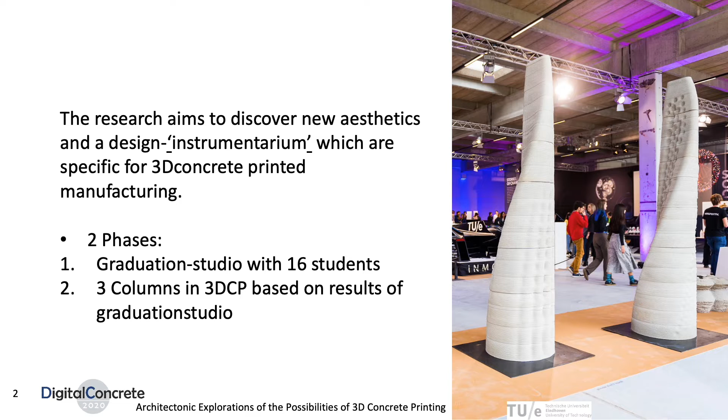The second phase consisted of printing prototypes. A selection of results and findings of the 1-year research in the graduation studio have been elaborated and collated into a new final product and summary design for 3 3-meter high columns featuring new aesthetic possibilities in 3D concrete printing.

The graduation studio was led by 4 tutors: Kuit, Sjef van Hoof, Zeeshan, Ahmed and myself, Juliette Bekkering. The research was done by many people. 16 students contributed actively to the results.

As a test case, we took the city of Ghent as location. The city has many buildings that represent a time when craftsmanship reigned supreme, and facades were ornamented with sculptures and carvings. Today's high labor costs mean that this ornamentation and complex formal language can only be realized in very exceptional cases. However, 3D concrete printing makes it possible to realize complex shapes and ornamentation, as the printing process makes complicated formworks and labor-intensive machining processes superfluous.

The question we asked ourselves is how can the richly decorated historical facades of the city become an inspiration for the development of new designs that can be realized with 3D concrete printing? A meticulous analysis of the historical facade fragments was done. Students reinterpreted the fragments using the technique of 3D concrete printing and translated that into new architectural designs that were printed in a laboratory.

The goal of the design studio was to allow design and experimentation with the 3D concrete printer to go hand in hand. Prototypes were printed and experiments done. Design by doing. The first starting point was to fathom the possibilities and constraints of the printer and the material: angles of inclination that could be printed, the straitjacket of the continuous printed line, limitations due to gravity, and the curing process of the material.

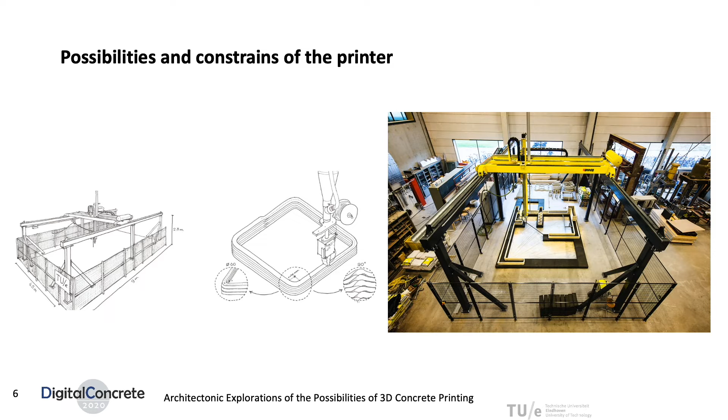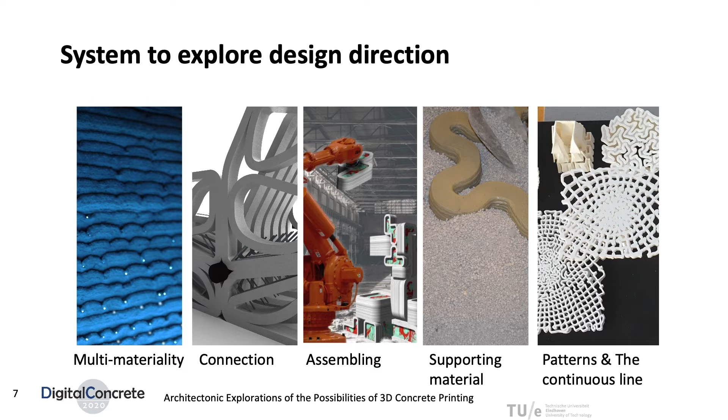The second starting point was that the students had to learn to work with a printer, from cleaning the printer to mastering programs that allow parametric modeling such as Grasshopper and Rhino in order to draw 3D models. In order to research the meaning of 3D concrete printing for architecture, the technique itself was researched along 5 parallel individual themes: multimateriality, connections, assembling, supporting material, and patterns.

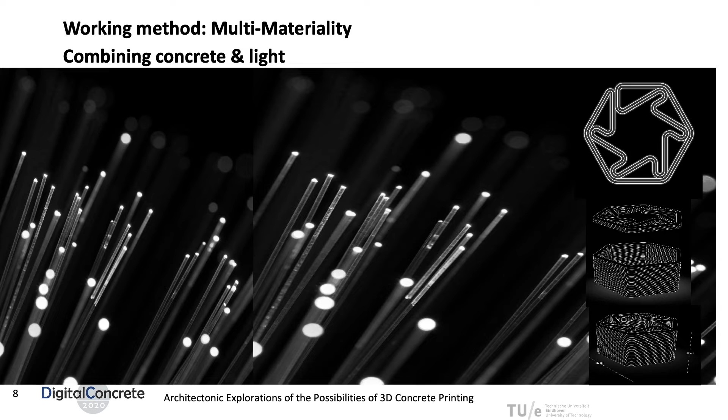Multimateriality, combining materials, concrete and light. Multimateriality and the potential of working with different materials was studied. In this case, the possibilities of creating a translucent concrete were tested. Glass fibers were introduced in the concrete, thus creating a translucent effect when lights were set on the surface. Glass fibers were in first instance put manually in the concrete. In a later stage, a device could be developed that inserts the fibers in the concrete during the printing process.

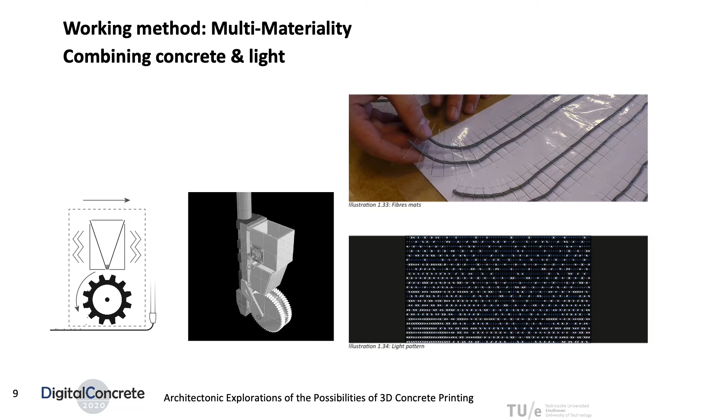The result was a concrete artifact that lights up when lights are placed on the inside. The glass fibers guide the light through the concrete and give the concrete a translucent effect, glowing like a lantern.

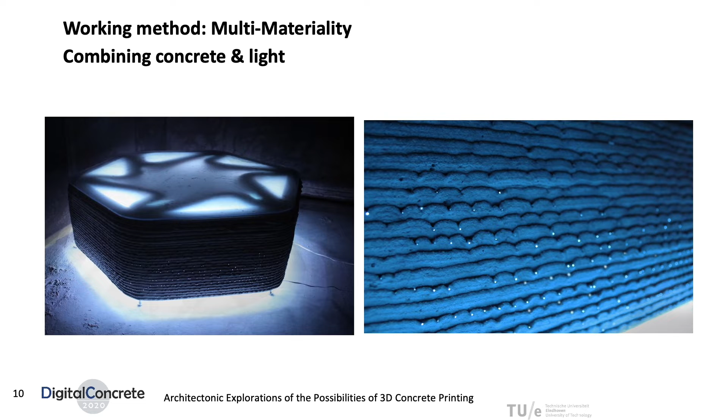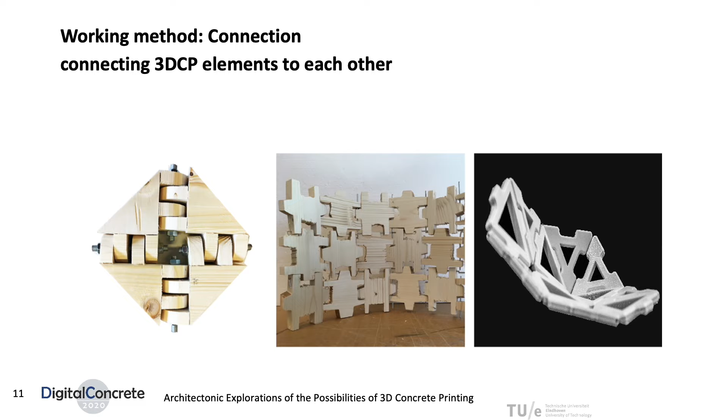Connection, optimization, 3D concrete printing and flexibility. The subject of the research was connection and how printed concrete objects can be connected to each other. Elements could form huge flexible walls, bending and bowing walls. In addition, the question was how 3D concrete printing elements can be attached to adjacent elements of different materials, such as window frames, doors, floors, and walls. Different kinds of joints were examined, exploring fixed and flexible joints. A prototype was made with flexible rubber joints.

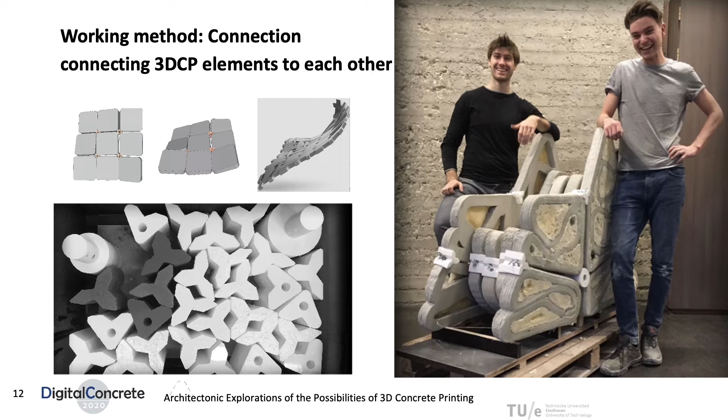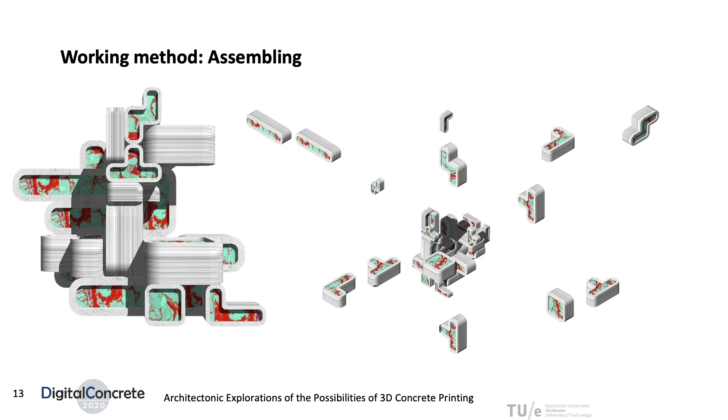Assembly. The group's research focused on how different fragments can be printed and assembled. Research was twofold. On the one hand, it focused on the development of complex geometries that could be printed. On the other hand, it focused on the way in which the individual elements could be assembled and interlocked to form a larger whole.

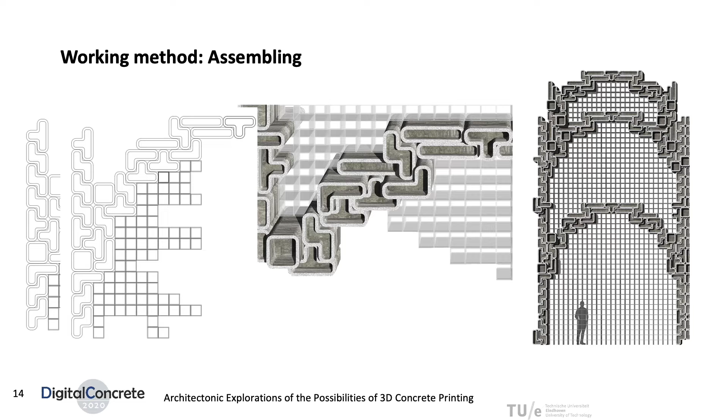Support. An important aspect in the use of concrete is the formwork and the way the liquid material is poured into a mold. A range of formwork materials has been tested, ranging from more traditional materials, such as sand and gravel, to more experimental materials, such as printing in glass beads, gel, liquid clay, and even in yogurt. The results were promising, as double curved surfaces, overhangs, and flowing round shapes became possible.

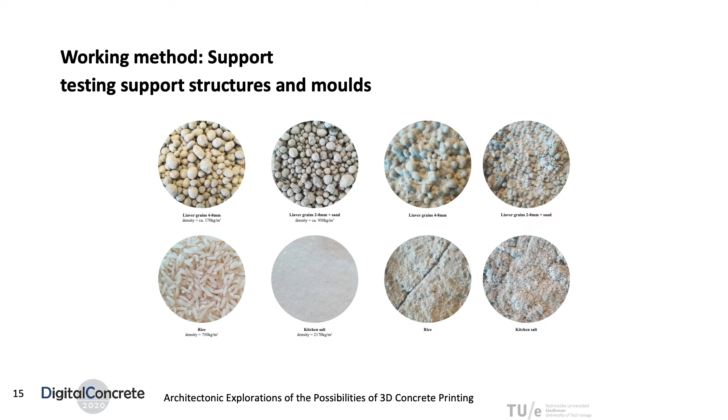For the artifact, the technique with glass beads was taken as casting material. Because the material tended to collapse after a number of printing layers, a system was devised to print the concrete in a crate, whereby the crate is raised during printing. The crate is continuously filled with glass beads during the printing.

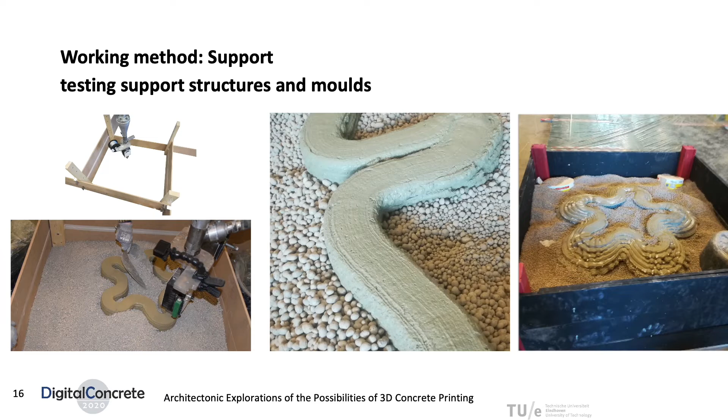The results of the research was a free-form vase in which the limits of manufacturability were explored. In the future, we expect a lot from this process of printing in liquid materials, where strictly speaking full 3D printing becomes possible and the limitations of gravity can be tackled.

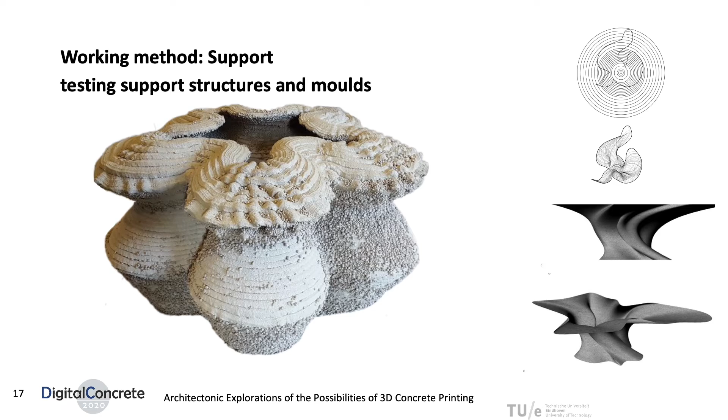Patterns and the continuous line. Finding textures and study structural properties. The technique of 3D printing lends itself perfectly to printing different patterns, the principle of the continuous line.

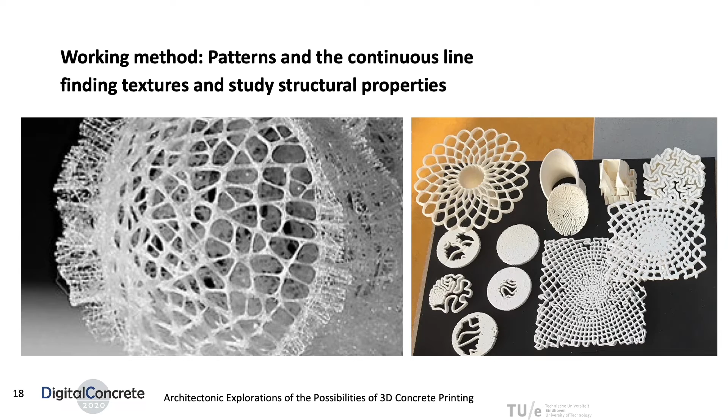By studying different mathematical models, we found that a lot of algorithms already studied could help us to fill a region with one continuous line that folds on itself. This was possible by combining two studies, the traveling salesman problem and the circle relaxation. The first one helped us to connect with one single line a certain number of points in a region, according to the shortest path. The second one ensures that between each point there is a fixed distance.

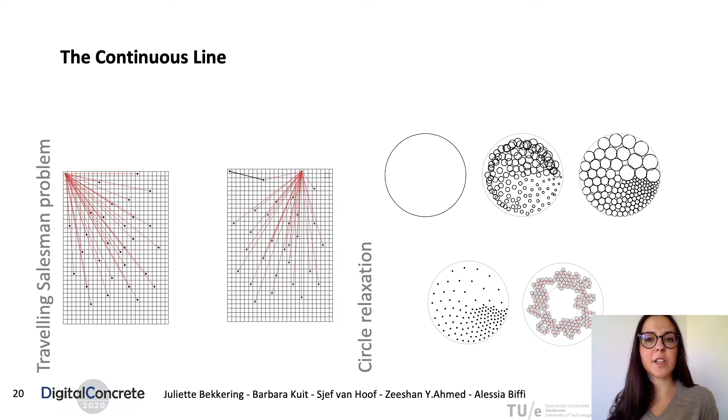This is fundamental in order to ensure that there is a fixed distance between the folding line of the printing path. This is done by making each point the center of a circle with a fixed radius. Through a system of vectors, the circles are moving in order to reach a status of equilibrium, where all the circles are tangent to each other. The radius of the circle, so the distance between each point, can vary by using a color code. In this way, we can fill a region with different sizes of openings.

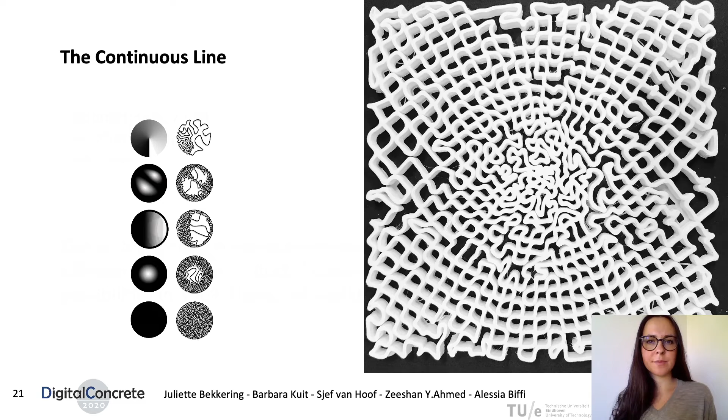Through these researches, we learned that using supporting material, we can print high elements with large cantilever, and that there is still a large field to discover on how we can improve the aesthetic qualities of 3D concrete printing. In addition, we understood that it's fundamental working with parametric model.

After this year of researching into 3D concrete printing, we combined the findings into 3 3D printed columns, which were presented last year at the Dutch Design Week in Eindhoven. This was possible thanks to collaboration between the TU Eindhoven University, and more specifically with Juliette, Bekkering, Sjef and myself, and together with a 3D printing specialist Vertico, guided by Volker Ruitinger.

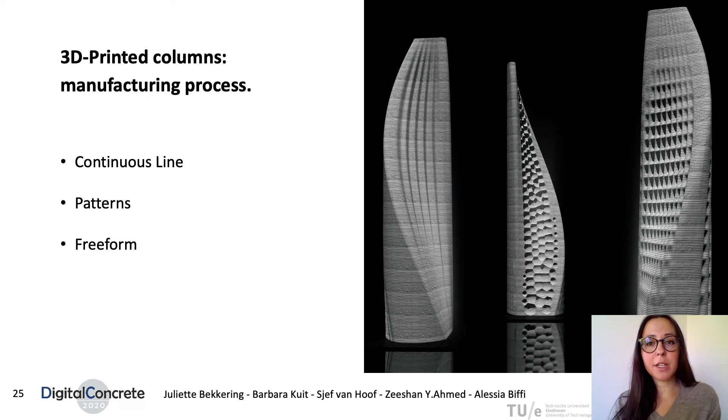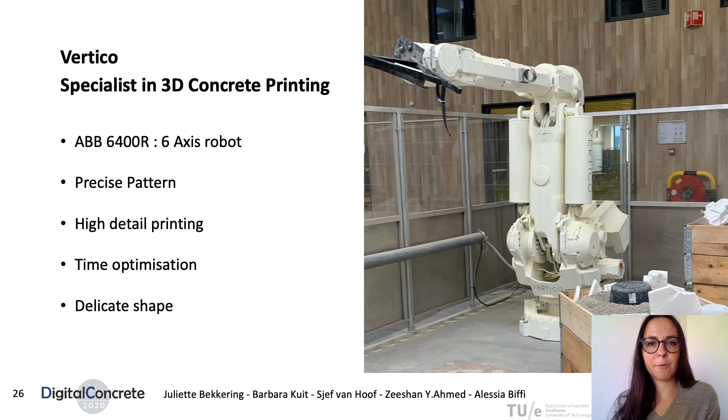We started to investigate how to design and manufacture 3 columns 3 meters high. The columns are characterized by free-form shapes and different patterns on their surface. The choice of collaborating with Vertico was fundamental in this aspect. Thanks to their experience and their 6-axis robot, we could reach highly detailed printings, thanks to the possibility to print a very thin print path. The 3 columns were designed by using the same script and by varying its parameters as height, rotation, and diameters.

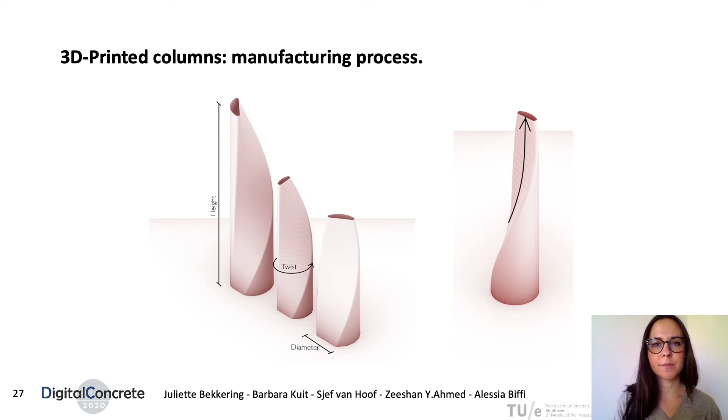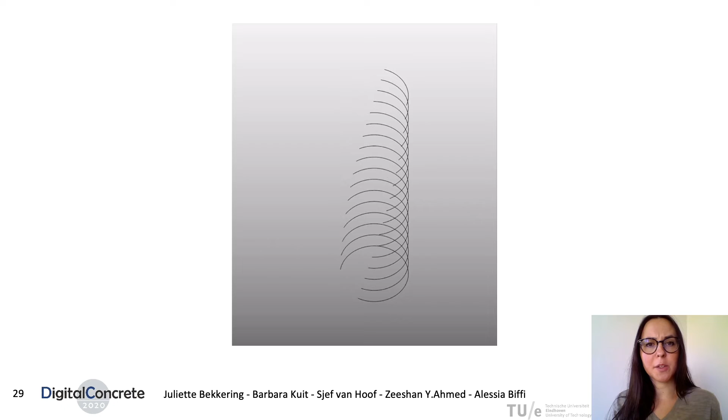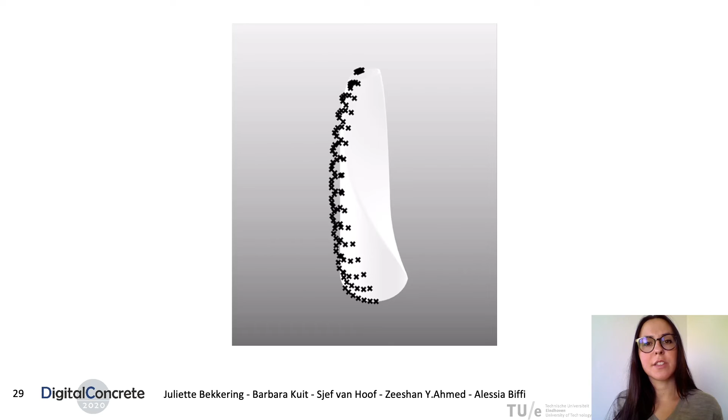On the twisted side, a particular pattern was investigated by tweaking the printing path. The starting point was a basic column. By varying its bottom and top and by rotating it, we obtained a twisted column. The column after is sliced in different pieces along the z-axis. Each curve is divided in points. These last ones are moved along a certain direction. By lofting all the curves, we obtain our 3 different columns.

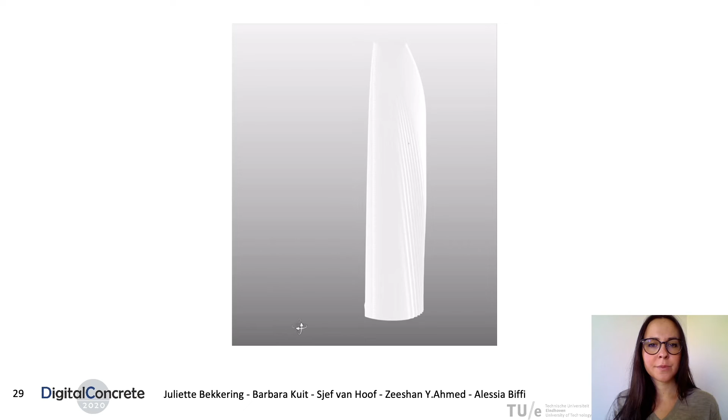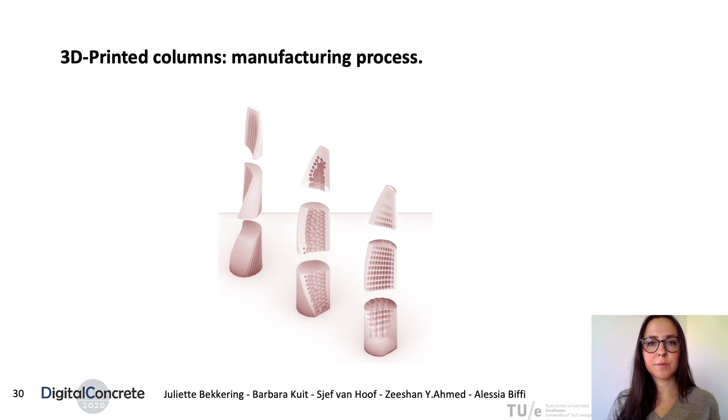Due to the dimension of the robot and our equipment to contain the supporting material, we had to split the columns in 3 parts, 1 meter each. This was also important to ensure the transportation to the exposition location. During the printing process, the use of glass balls as supporting material was fundamental. This was made to ensure that the cantilever sides were not collapsing. We printed inside of a wooden box that was filled with supporting material during the printing process. Once the print was done, we waited 24 hours for the concrete to dry to remove the balls.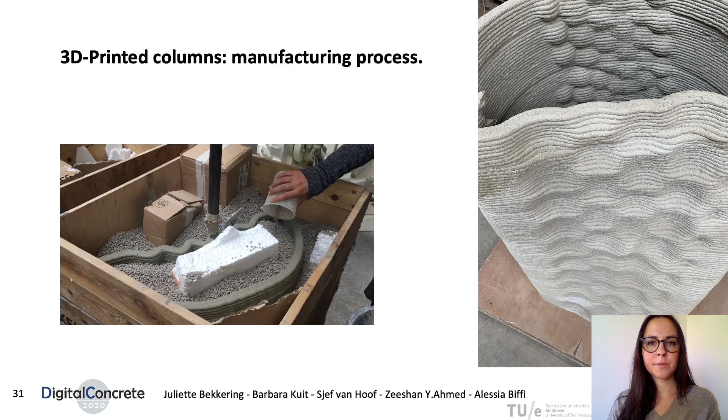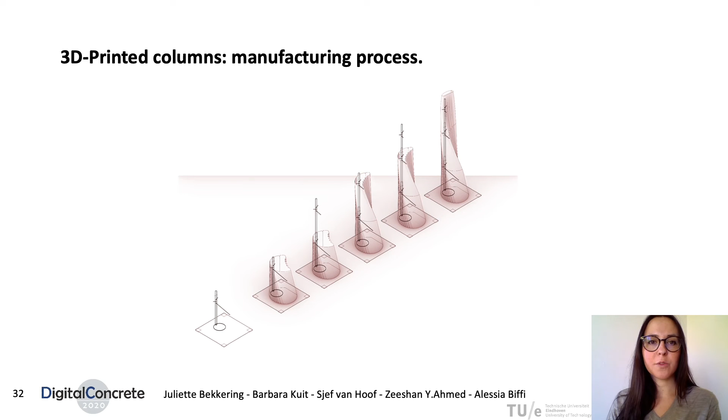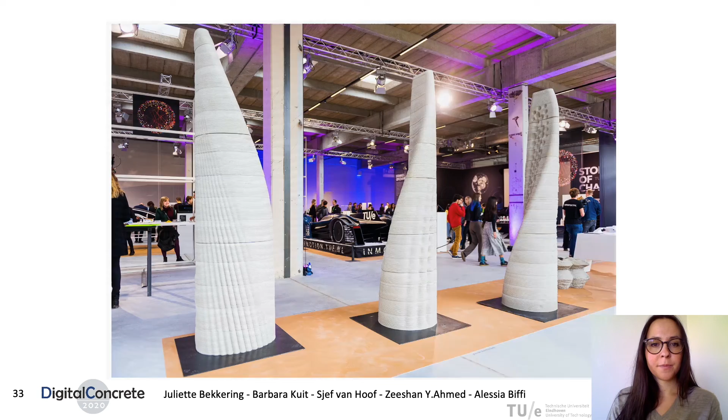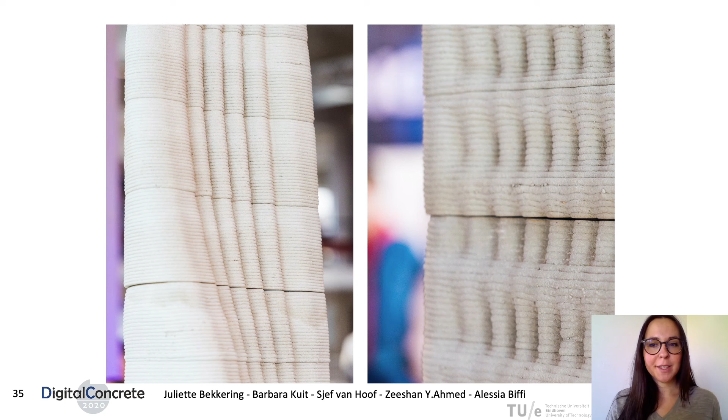For safety reasons, a steel structure was designed inside of the columns, in order to ensure that each piece was stable on top of each other. And these are the columns presented at Dutch Design Week, and as you can see, there is no protection around them because people could get closer and touch them. In this way, people could also see the high quality and the high detailed printing of our columns and get closer to the pattern that we created on its surface.

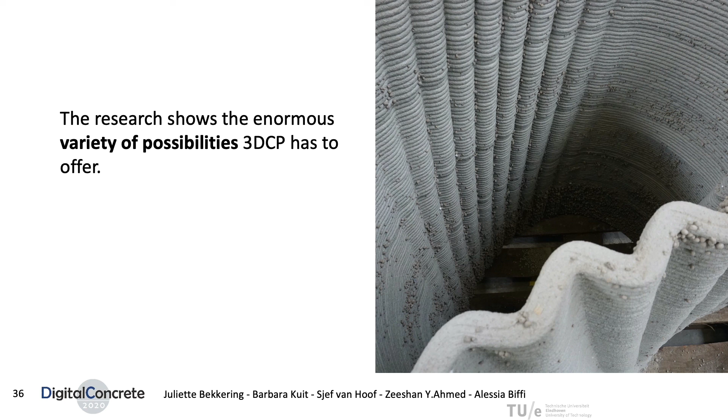The research shows the enormous variety of possibilities that the technique of 3D concrete printing has to offer. Highly detailed shapes were realized and significant overhangs were printed. New patterns and ornamentations can be developed, and a whole new architectural language of complex freeforms is possible. An important new step will be to translate the results of the research into new applications in the built environment. By this, a whole new architectural language is there to be explored.